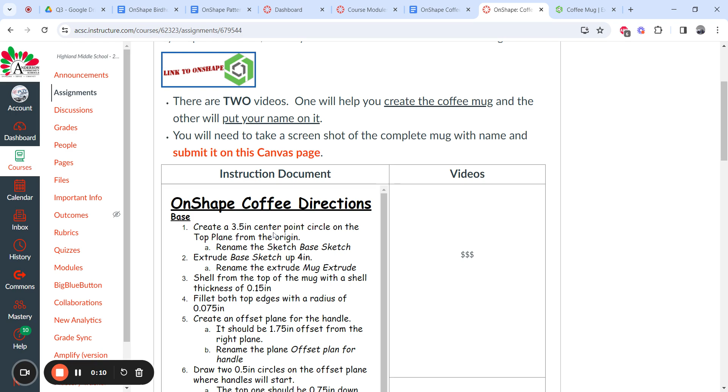This first video is about doing the base and everything, then the next video is going to be about adding text. So let's look at this. The very first thing I need to do is create a 3.5-inch center point circle on the top plane based on the origin. Then I'm going to rename it Base Sketch.

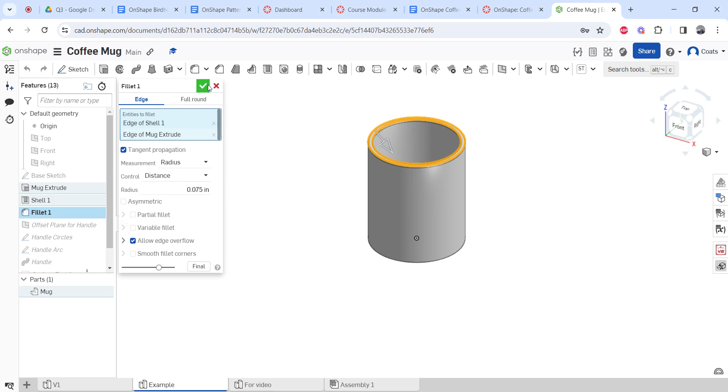Once I'm logged into OnShape, hide this thing down here on the bottom. I am going to go over here and click on my top view. I'm going to say Sketch. Where am I sketching? On the top. I'm going to make a center point circle, starting in the origin like I said. Click and click, and it should be 3.5 inches.

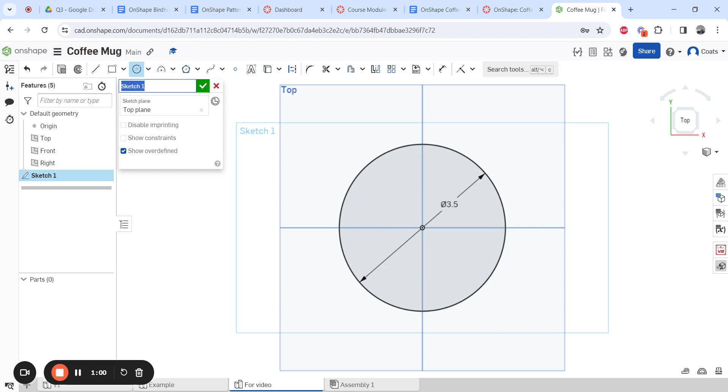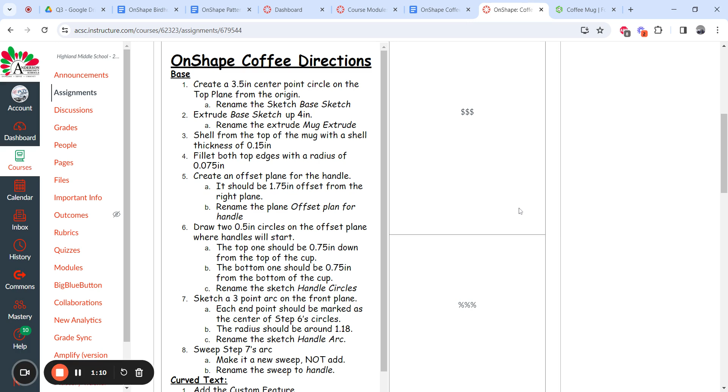Enter. Okay, now you can either rename it right here by clicking this and then saying Base Sketch, or if you hit your check mark first, then you can just go over here and right click and say rename. Once you start making a bunch more difficult things on OnShape, it's really a lot easier to keep track of things if you rename them.

For example, in my example over here, see how I have them all named? That's what you're going to be seeing when you're done. So if you mess up, you know where it's going to be. Okay, so we did that one.

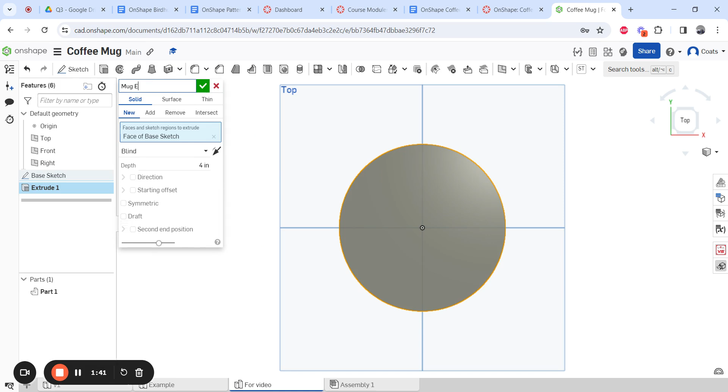Now we're going to extrude that sketch 4 inches, and we're going to rename it Mug Extrude. So I'm going to extrude that, it's going to be 4 inches, and I'm going to rename it Mug Extrude. I'm going to finish with my check mark there. Now I should have that right here.

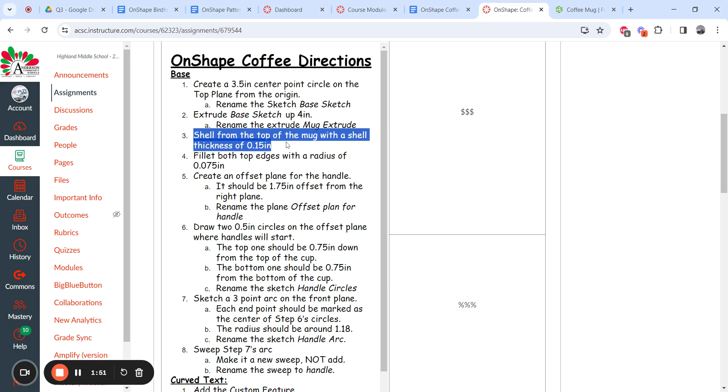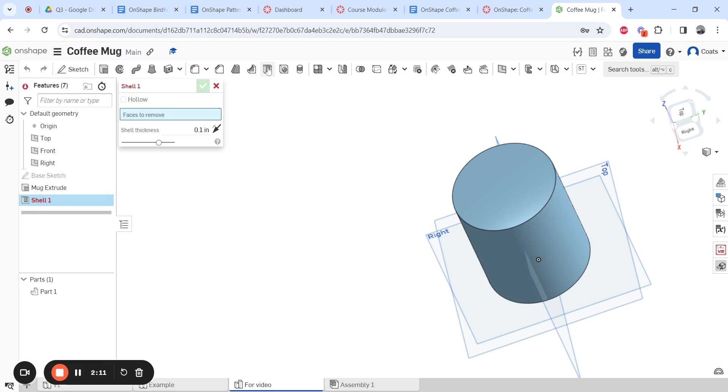Next step, I am going to shell it from the top. This should be a new tool for you in my class right now, where the thickness is going to be 0.15. So what shelling does is make it empty. Our shell button is not under sketch or anything, it's going to be right here where my mouse is, about 40% across your toolbar. Click there, and it asks what do you want. Well, I told you to go from the top, right? So you're there, and then instead of 0.1, we're going to make it 0.15, like I said. Now we hit our check mark, and now you can see that it is hollow.

Next, nobody wants to drink from a mug that has sharp edges, so we're going to fillet it on both sides, 0.075. Those of you that are good at math, well, 0.075 is half of 0.15. So that's what we're going to do.

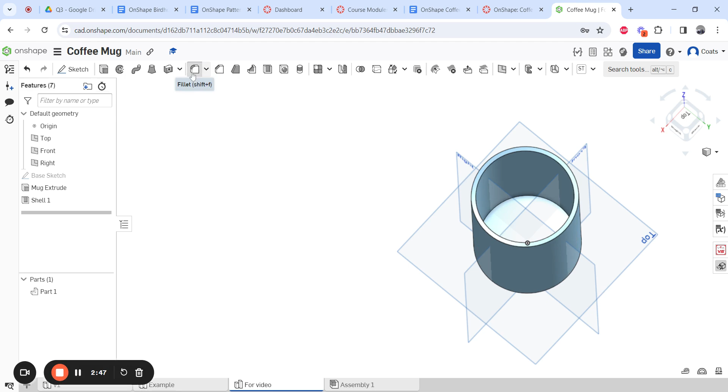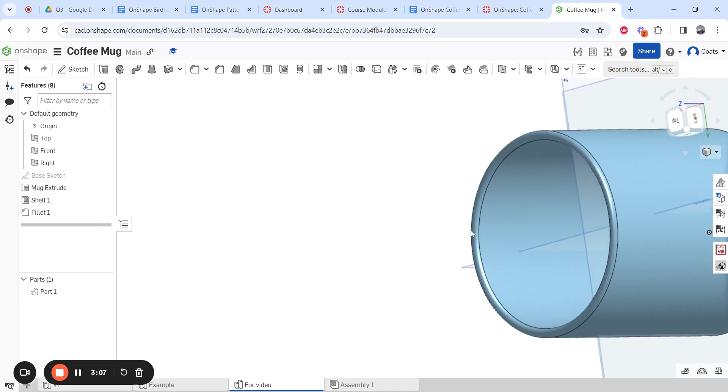So I'm going to find my fillet tool right here, click on that. I'm going to click on this corner edge, and I click on this corner edge. Look, I got a red error at first, but that's because it's 0.201, and that's bigger than the whole shell was. So that's why if we change it to 0.075, the error goes away and it works. Check mark it. See, now we got a smooth edge on the top, so nobody's going to cut themselves.

All right, now we're going to create an offset plane. That's going to be 1.75 inches from the right plane. We're going to rename it the offset plane for the handle, and I need to fix my spelling right there.

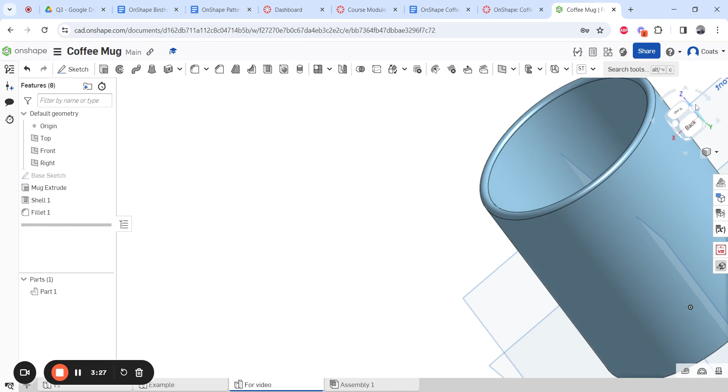That being said, let's go back to this view right here, so that way you can kind of see your front.

How do you make an offset plane? You can right click on the plane you want and say offset plane, or go over here and right click on it. I'm going to go over here. What did I tell you guys? 1.75. So, 1.75, check mark. And we're going to rename it offset plane for handle, check mark. See how now we have a plane that shows up over here that wasn't there before? And then there was the original right plane.

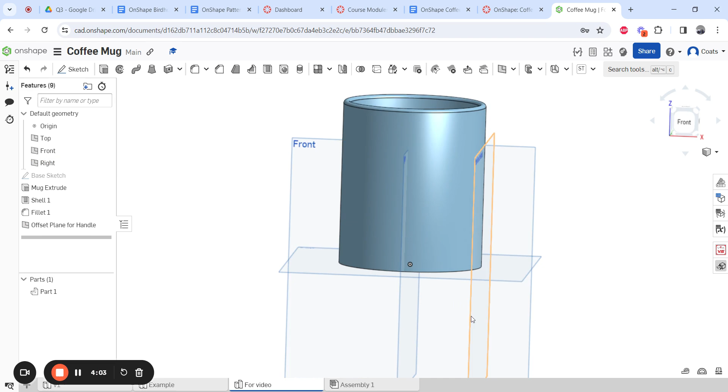This is how we're going to draw our circles. So now we're on step 6. We're going to draw 2 half-inch circles on the offset plane where the handles should start. The top should be 0.75 down from the top of the cup, and the bottom circle should be 0.75 up from the bottom of the cup. Then we're going to rename it sketch handle circles.

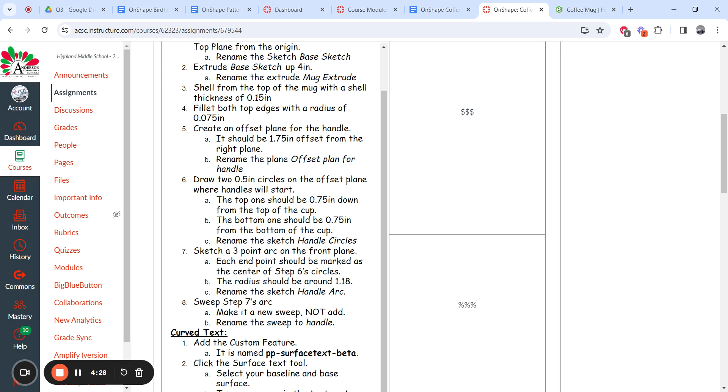Okay, I'm going to go over here to this view. And I'm going to say sketch. Where am I sketching? Make sure you click on offset plane for handle - not right, this one over here, offset plane for handle. Once you do that, you can click on your right view. You can go to your circle. Just start a circle right here. And how big did I tell you the handle to be? 0.5. So, 0.5.

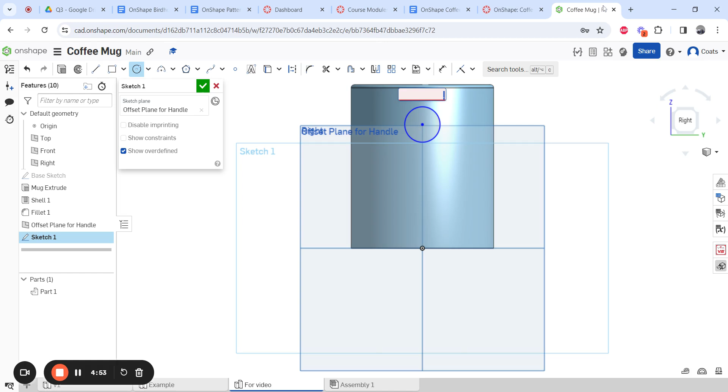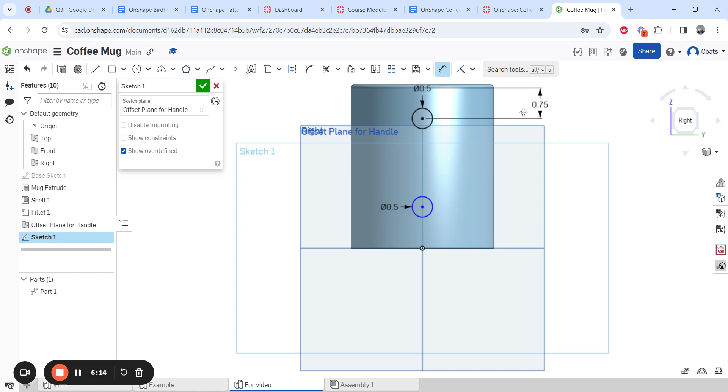Do another one that's based on that line right here, and it's going to be 0.5. And now I need to make sure I space them from the top and the bottom the way I want. So you can press the D button on your keyboard, or you can press dimension right there. I'm going to click right there. So this edge to this edge should be 0.75, and it self-adjusts. Then you're going to put that one to that one and make it 0.75.

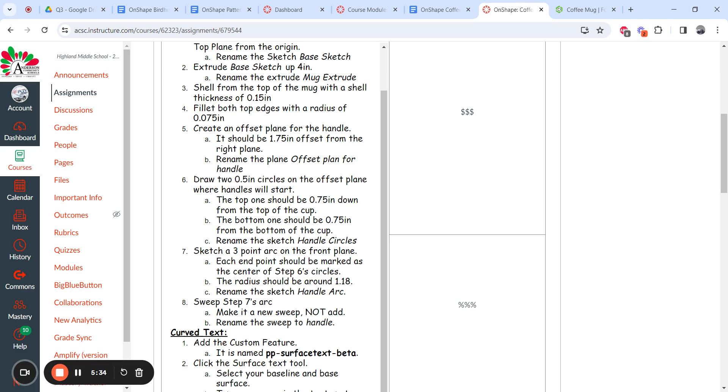And then we're going to rename it handle circles. And does that finish that step? Yes, it does. So now we're going to move on to step 7. So finish that sketch.

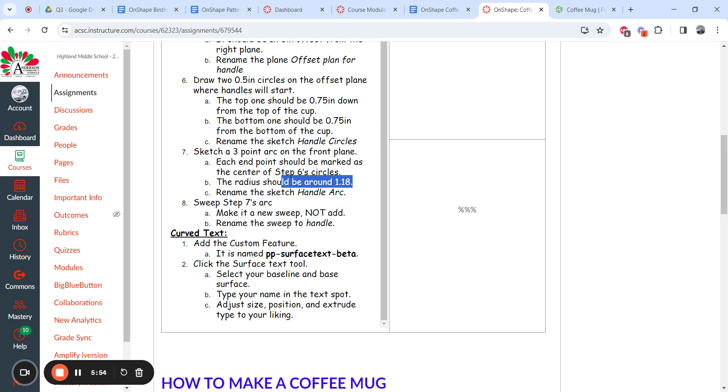Step 7: we're going to sketch a 3-point arc on the front plane. Each end should be touching the center of step 6's circles, and the radius should be around 1.18. Rename it to handle arc.

So, sketch. Where am I sketching? I need to move to the front plane. And then I'm going to say 3-point arc, and it's going to go from the center of this circle to the center of this circle. And then after you just kind of eyeball it and move it, it says, what do you want the radius to be? Well, I said about 1.18. So, 1.18.

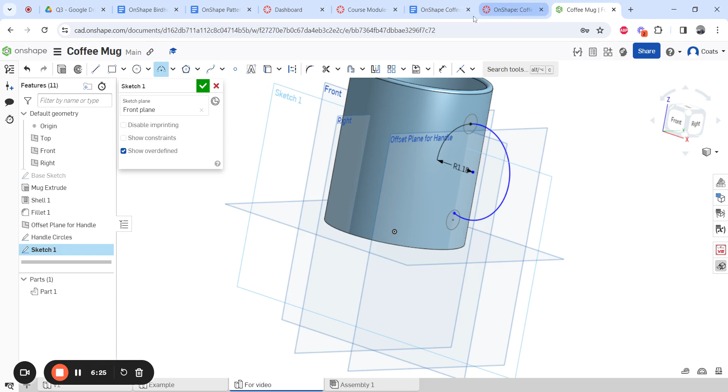There's that. And then we're going to rename it the handle sweep, and we're going to hit our check mark. You can kind of see we're already almost done - all we got to do is actually make the handle. So that would be step 8: we're going to sweep step 7's arc. We're going to make it a new sweep, not an add, and we're going to rename it handle.

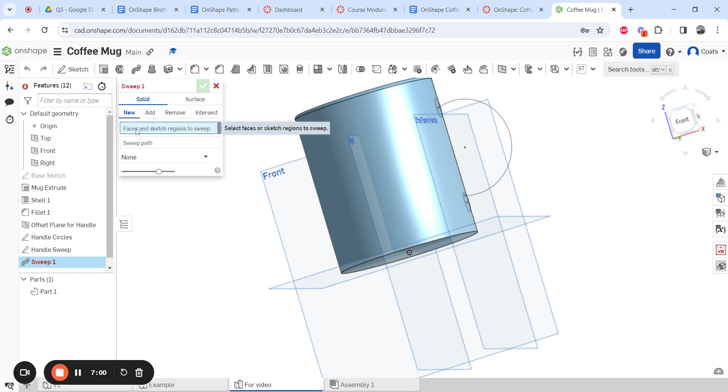So where's our sweep button? You've used extrude before, you've used revolve before, now you're using sweep - it's new for you. So sweep, and it's going to say select the entities that you want to sweep. So that's going to be that circle and that circle. The path - click on the path, so now it's blue, and it's going to be the line we drew.

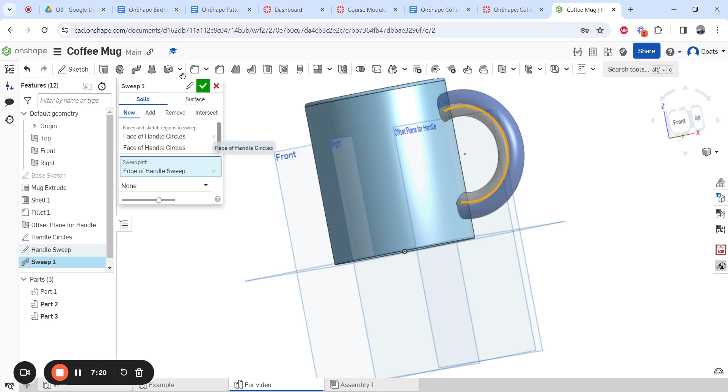We get an error. Well, how are we going to fix that? We're going to say new. Then we hit our check mark. Now we have our handle. But we're not quite done yet - you'll see next in our next video.